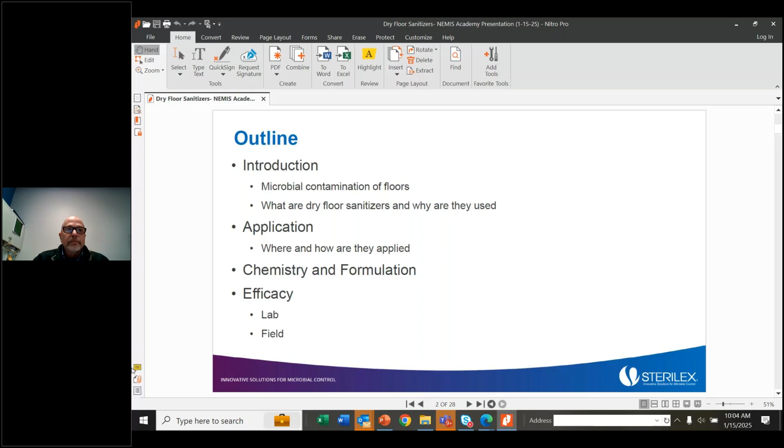All right, so why should we care about floors? I think most people on this call probably understand this, but studies have shown that floors are a high risk area for pathogen contamination, even dry floors. And it's not too hard to understand why. You have foot and vehicle traffic bringing things in. You have soils that are brought in with that foot and vehicle traffic, or soils that get deposited on the floor from various parts of food production. You also have irregular surfaces with cracks and crevices, which make nice little habitats for microorganisms to hide out in. And then last, but certainly not least, you have drains, which I think, again, probably most people on this call understand are a very good reservoir for microbial contaminants.

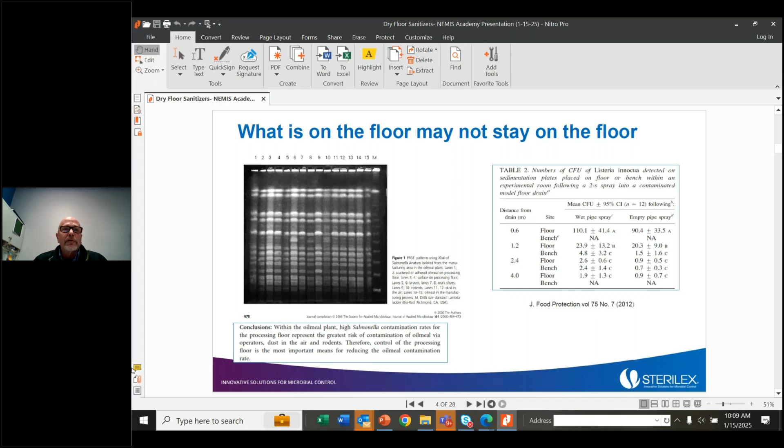So I think you can understand that just because it's on the floor doesn't mean it's going to stay on the floor. Now, there are a number of wet chemistries out there for treating floors. What I'm going to talk about today is a dry type product, a dry floor sanitizer.

And what this is, it's a dry powder or granule applied to floors that, when it's activated by moisture, and we'll talk a lot about this moisture part, exhibits antimicrobial activity in the surrounding environment. The actives and inerts vary in these products, and we'll talk some more about that when we get into the chemistry. And they're used primarily for two reasons.

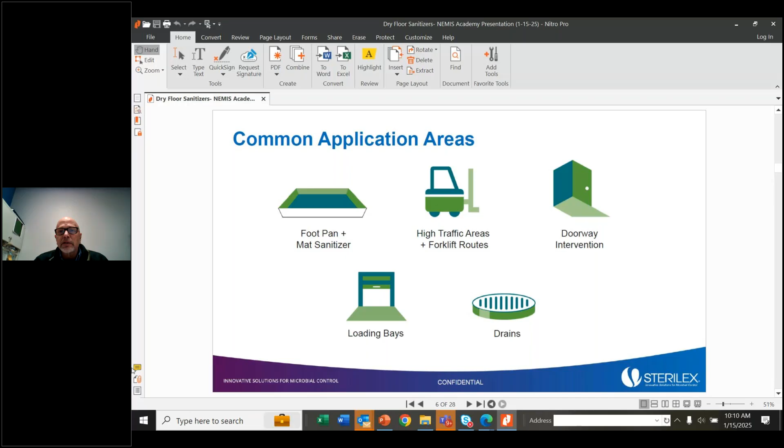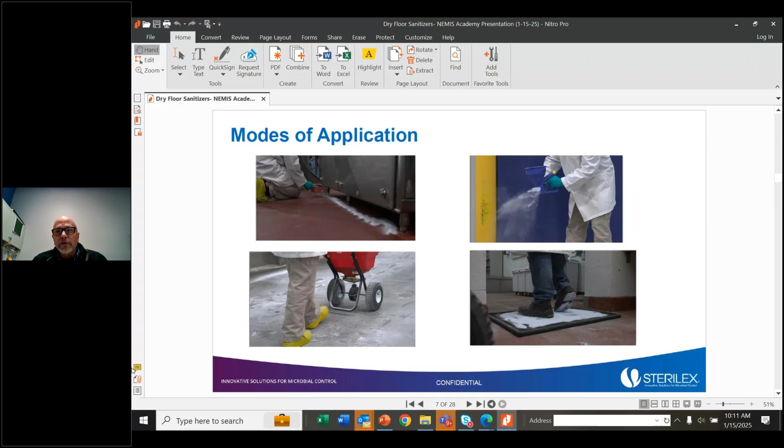If you look at the picture in the upper right, here they're using a handheld spreader, similar to what you might use to spread fertilizer in your yard. And then if you had a larger application, you might use a larger fertilizer type spreader, which is shown in the lower left. And then you can see also some people will put it in a pan or a tray, which people will walk through as they go from one area to another. Now we get more into the science of these products, and I'll start with chemistry and formulation.

So these products have an active ingredient, and then they have co-formulants, and we'll talk about both. With regards to actives, the most common that you'll see out there are oxidants, and among the oxidants, the most common is hydrogen peroxide. But we're not talking about hydrogen peroxide as a liquid. We're talking about it typically in the form of sodium percarbonate. And if you look at the little chemical equation on the right, you can see that sodium percarbonate has hydrogen peroxide associated with it, and then it'll dissociate and form hydrogen peroxide or release hydrogen peroxide, which is a

good sanitizer disinfectant. However, hydrogen peroxide does have what I would call a little bit of an Achilles heel, and that is there are a lot of bacteria out there that make an enzyme called catalase, and they can break hydrogen peroxide down to water and oxygen. And so if you have a low level of hydrogen peroxide and you have a very active catalase population, you could see that peroxide dissipate fairly quickly.

Another oxidant that you'll see commonly used is peracetic acid. Again, we're not talking about liquid peracetic acid. In this case, the peracetic acid is going to get generated in situ. And typically the product will have a source of hydrogen peroxide, like sodium percarbonate, and then it'll have another molecule. In this case, it's TAED. And when the two mix, they will form peracetic acid in the presence of moisture. And so again, we're not talking about liquid PA, we're talking about PA that's going to get generated from two components in the powder when the powder comes in contact with moisture.

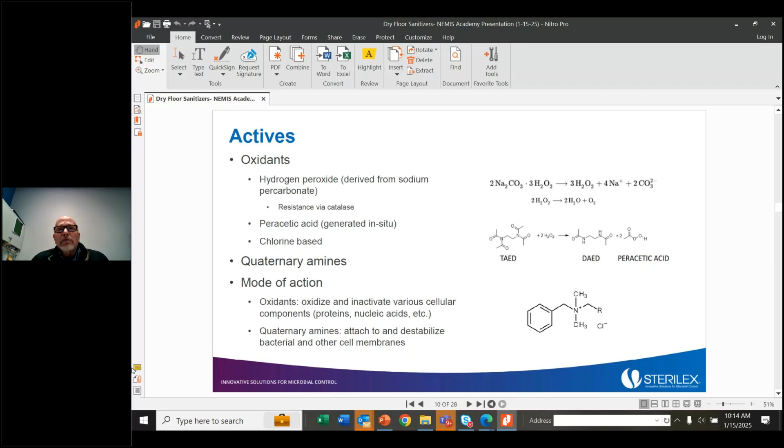Quaternary amines tend to be a little more specific. They attach to and destabilize bacterial and other cell membranes, even though there's been some recent data to show that they have other functions as well. But typically, their primary activity is in destabilizing cell membranes. Now, coformulants. So a typical product is not just going to have an active ingredient. It's going to have other components. And what I have listed here are some of those other components that you might see.

So there might be a pH adjuster to maintain a proper pH. There might be wetting agents, and these are designed to reduce surface tension of water. So when the powder gets wet, it'll allow for the actives to spread out over the surface and enhance contact with microbes. But these wetting agents can also impact antimicrobial activity, and I'll talk about that on the next slide. Typically, you might see a chelant in these products. They're designed primarily to increase the stability of the active, especially in the presence of hard water. But like the wetting agents, they may also affect antimicrobial activity. Chelants are very good at destabilizing the outer membranes of gram-negative bacteria. They're also very good at destabilizing biofilms too.

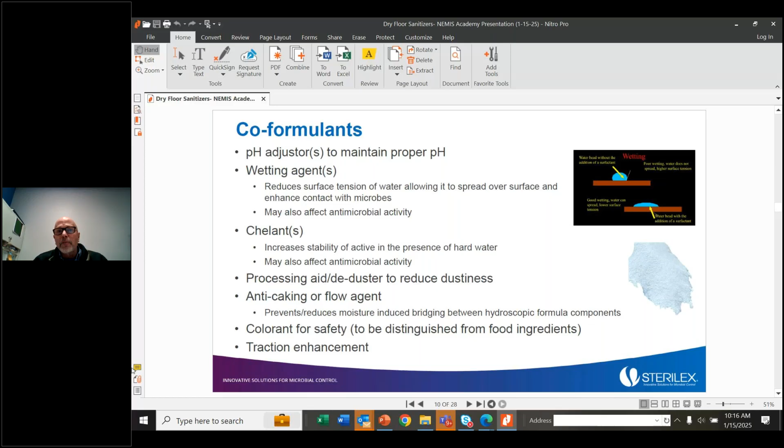There might be a processing aid, a deduster to reduce dustiness. There might be an anti-caking or flow agent to prevent caking of the product, especially if it's being stored in a really humid environment. Other coformulants can include colorants for safety so that the product will be distinguishable from, say, a white food ingredient. And then also these coformulants may help in terms of traction enhancement.

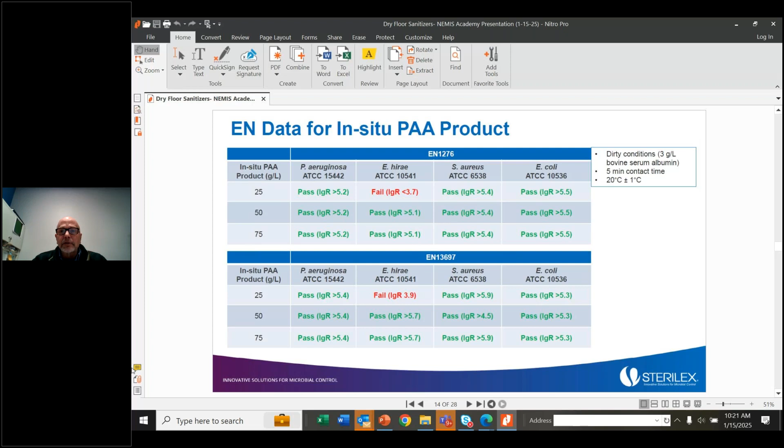And what you'll see is that in this case we failed at 25 grams per liter, but we passed at 50 grams per liter. And this was done under dirty conditions, which is a certain level of BSA, with a 5-minute contact time at room temperature. So since we failed at 25 grams per liter, we have to make our claim at 50 grams per liter. So for example, for this product, on our label, it would say use at a level of 50 grams per liter.

And I was giving this presentation, I used this joke last time and nobody laughed. And I suspect nobody's laughing now, but I'm going to keep using this joke until I do get at least one person laughing at it.

But in reality, that's not what we're doing, right? We're not applying the product to a beaker of water on the floor. Well, it might interest you to know that if you think about a square meter area and water to a depth of 1 millimeter, which is not a lot of water, that actually is a liter of water. And so for that, you can kind of construct, okay, if I have water that I think is approximately this depth and I'm treating this amount of area, then you can understand how that 50 grams per liter can easily get translated into how much product I need to apply to that area.

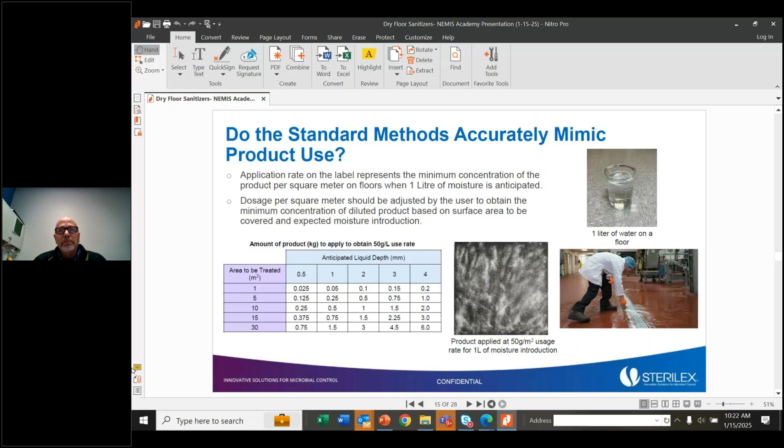Which begs the question, what about if I'm not applying it to a wet floor? What if I'm putting it on a dry floor, whether it's in a tray or I'm laying it down in a broadcast application, and my interest is reducing cross-contamination? Do these test methods mimic that type of application? And the simple answer is no, they don't.

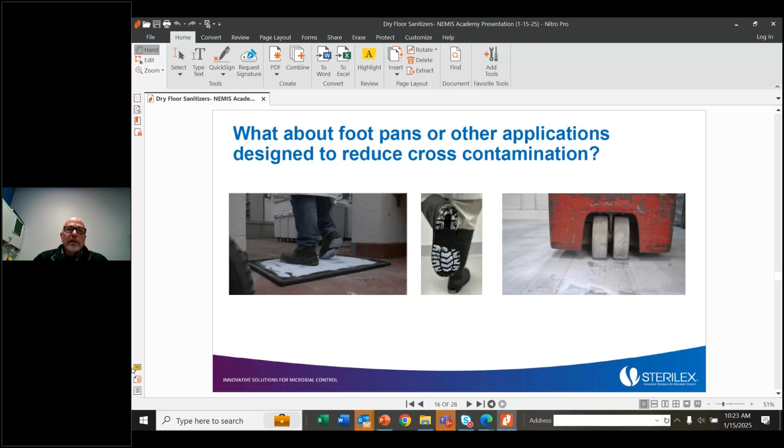So one of the things that my group has been working on at Sterilex is to develop practical test methods that really mimic how these products are being used in actual production environments. And one of those methods that we developed, we call the mini boot method. And what this method is designed to do is measure the effectiveness of a dry floor sanitizer in reducing cross-contamination.

After 5 or 10 minutes, we then add a neutralizer to these Petri dishes, not the one that has powder in it, but the 3 subsequent Petri dishes, because what we're looking for is the reduction of contamination after something's gone through the powder. And then we'll neutralize, we'll recover the surviving bacteria, we'll do serial dilution and plating to determine the bacterial count.

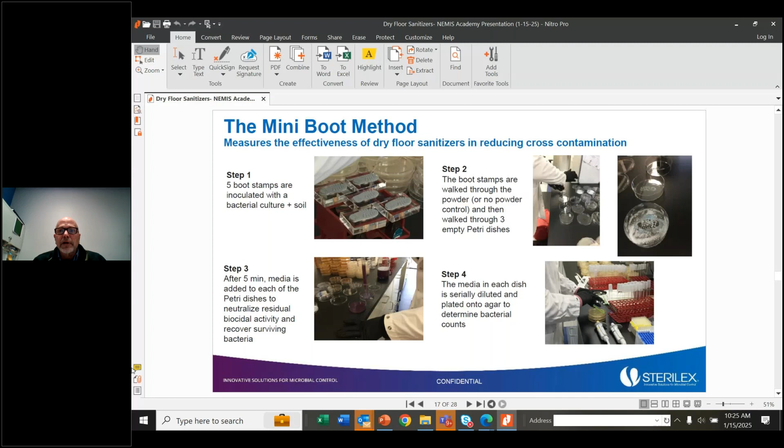Now, does every dry sanitizer work this well? And the answer is no. We've evaluated several dry sanitizers with this test system, and I would say that at the very least, we see a 2-3 log reduction. And then with some products, we see this level of reduction. So again, with any product we've evaluated so far, we at least see a 2 or 3 log reduction, but not always this level that we're seeing with this particular product.

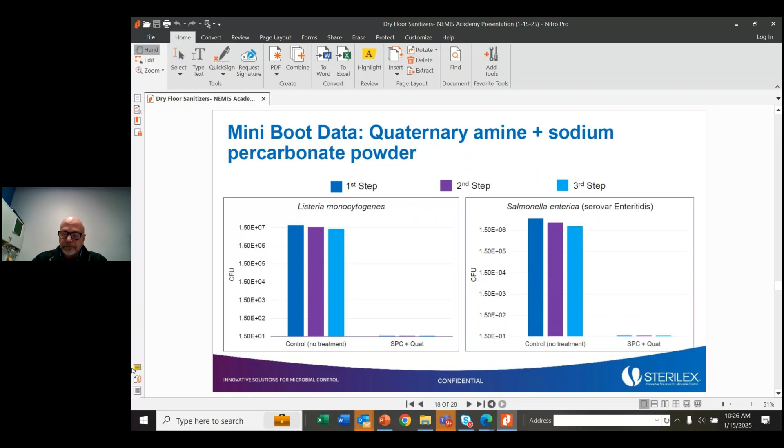Okay, so another question we get asked all the time is, what if there is no water? And my first response to this is, are you sure there's no water? So if you put a dry floor sanitizer on a dry floor, and somebody walks through it with a wet boot or some other instrument, or a forklift that's got some water on the wheels, you've added water. So it's not a completely dry environment.

But let's say it is. Let's say no water is getting introduced in any way, shape, or form. It's going on a dry floor, and the only potential for moisture is, say, relative humidity. Can the powders do anything under those conditions? And the short answer is yes, but it takes some time. So what we did here is we constructed another method where we prepare a bacterial inoculum with, again, a soil load.

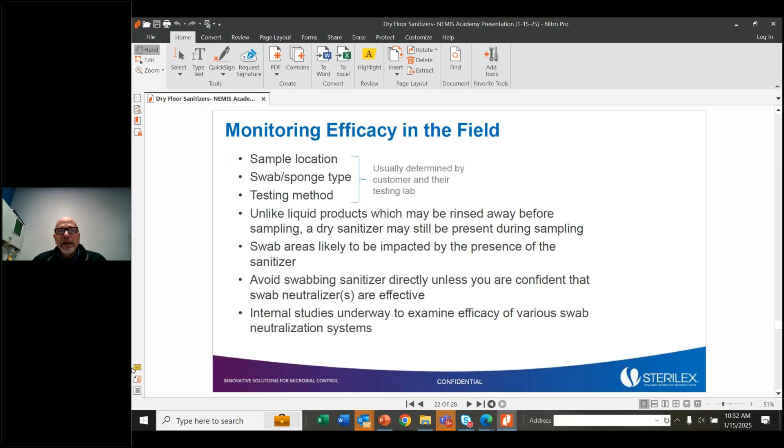And this is something that we've actually taken inside my lab too to look at more closely. We're doing some internal studies now to look at various swab neutralization systems that are out there to see if any one works any better than any other one. And if from that, we get some data to suggest that, hey, even if you pick up a little bit of powder with this swab system, it's okay, then we might start making some recommendations. But for now, we're not doing that. Again, we're generally just saying don't swab the powder directly. Swab the areas that you're trying to impact by applying the powder.

Okay, so the first case study I'm going to talk about is in a protein processing facility. This protein processing facility was using a doorway foamer. They weren't happy with it. It was frequently breaking down, it was applying chemistry inconsistently, and creating a wet and slippery environment. And so they converted to a dry sanitizer, and they were applying it to foot mats in the doorway entrances and directly to the floor for forklifts to drive through.

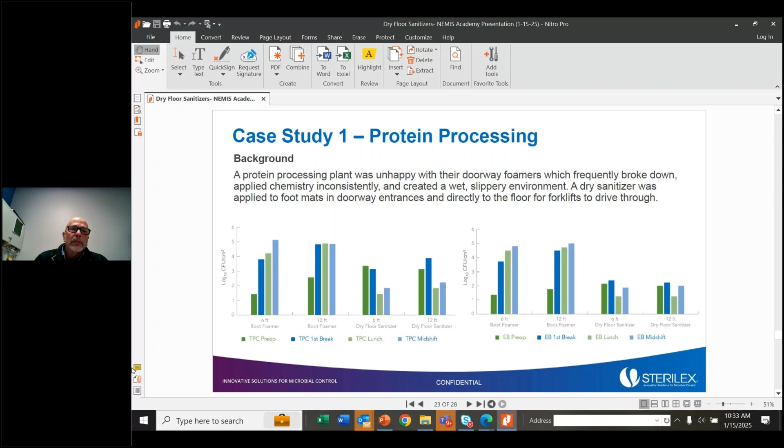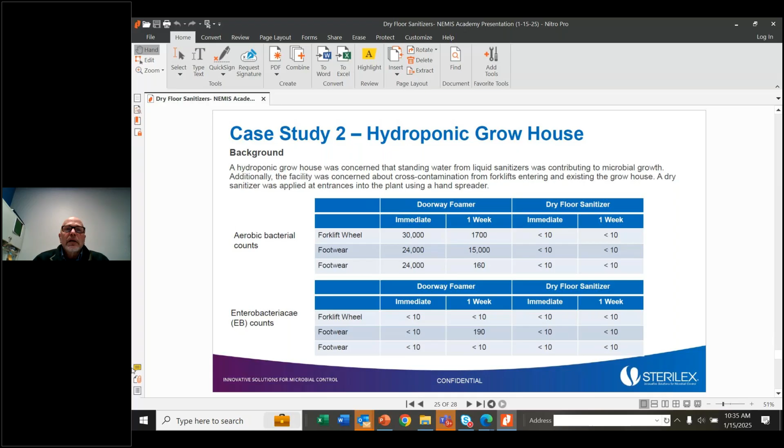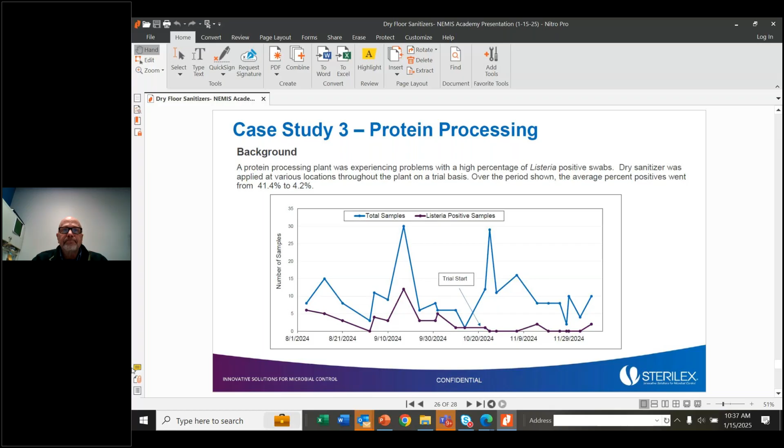Okay, so to summarize, dry floor sanitizers are dry powders or granules applied to floors that, when activated, exhibit antimicrobial activity in their surrounding environment. They sanitize and disinfect the location where they're applied. So if you're thinking about a drain, that would be an example. But again, they're also used to reduce the spread of microbial contamination from one location to another via foot or vehicle traffic. Locations for use: foot pans, entryways, drains.

Again, these products are formulated products, just like the liquid products that you may be used to. So you're going to have an active ingredient and coformulants, and those coformulants will have various functionalities.

Efficacy standard test methods are used, again, for registration and labeling, but may not accurately reflect the use of these products. And we're seeing regulatory agencies, both in the US and the EU, saying, hey, we really want to see some methods that more accurately mimic how these products are used. And so this is a thing that we continue to work on in my lab, is about how to develop methods to mimic how the products are being used. So you'll hear more about this if you follow this type of product.

We realize that field results ultimately determine success. As a longtime microbiologist working with biocides, I've been involved in both. I'm partial to lab studies because they can be very controlled and I can clearly show benefits or lack thereof. Field trials, as probably most of you know, can be a little complex. Other things happen and so on and so forth. But ultimately, we realize that you have to see performance improvement in the field, or there's no reason to purchase the product.